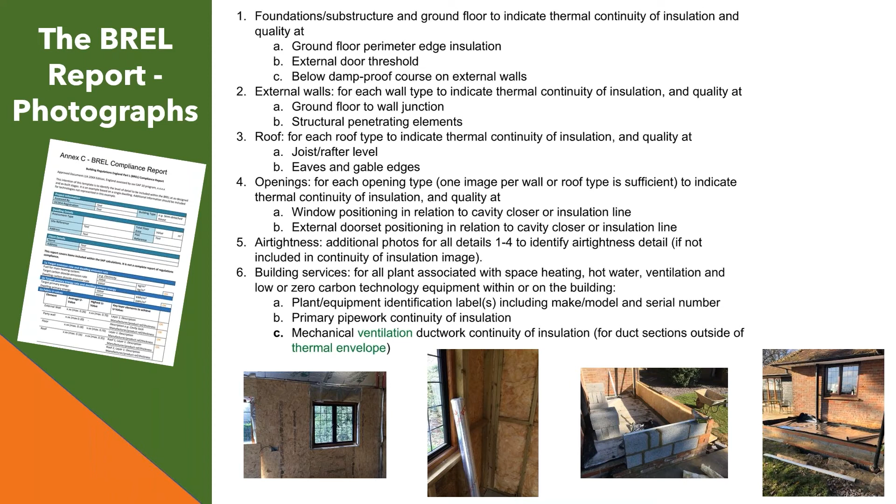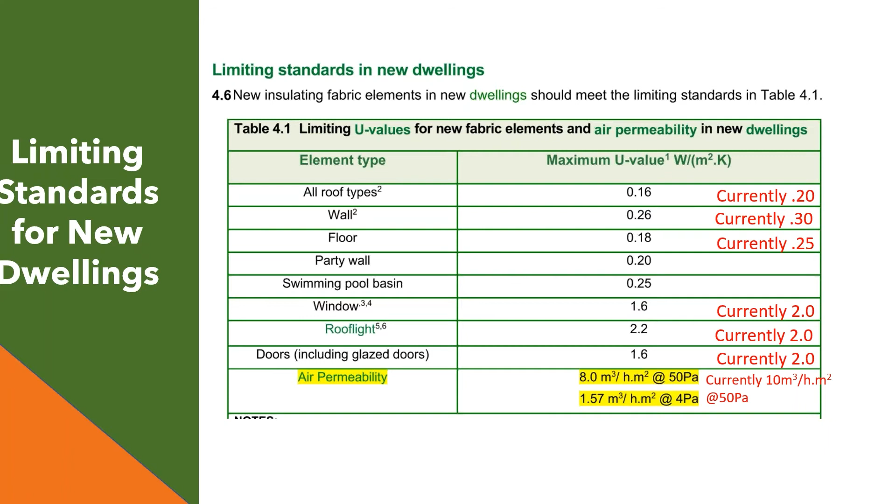And the definition of primary energy is energy from renewable and non-renewable sources which has not undergone any conversion or transformation process. So, for example, you've got chemical energy contained in fossil fuels like coal. Coal is a source of primary energy. However, a unit of electricity generated by burning that fossil fuel would not be considered primary energy because it has gone through a conversion process.

Similarly, with natural gas, it has to be got out of the earth, it has to be refined and transported, and that all uses energy, and same for oil. So the SAP calculation uses primary energy factors and heating plant efficiencies to convert the calculated energy requirements of a dwelling into a primary energy demand figure.

So the primary energy factor, for example, for mains gas is 1.13. In other words, we will need to have 1.13 kilowatts of energy to extract 1 kilowatt of gas from the earth, which includes refining it and pumping it through the UK's pipe network to reach the dwelling. Electricity, surprisingly, is a little bit higher. That's currently 1.5, but of course, these will all change in time as technology improves.

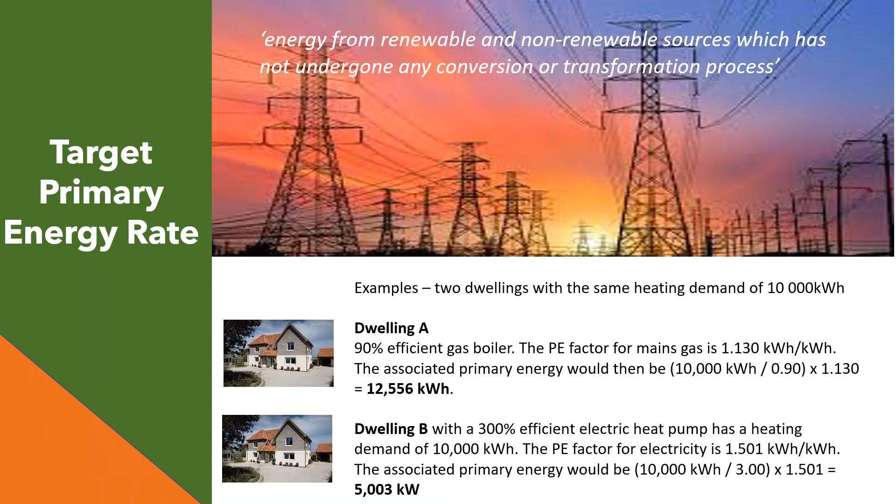So, as I say, the target for primary energy use will take account of both the property's heating system efficiency and the energy use that's needed to produce the fuel and deliver it to the property. So hopefully I got through that, and it's reasonably clear in your minds what that's about.

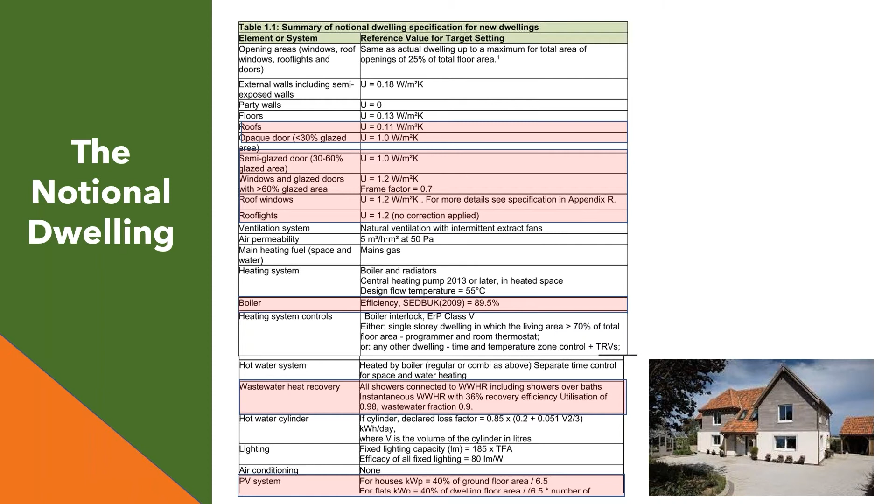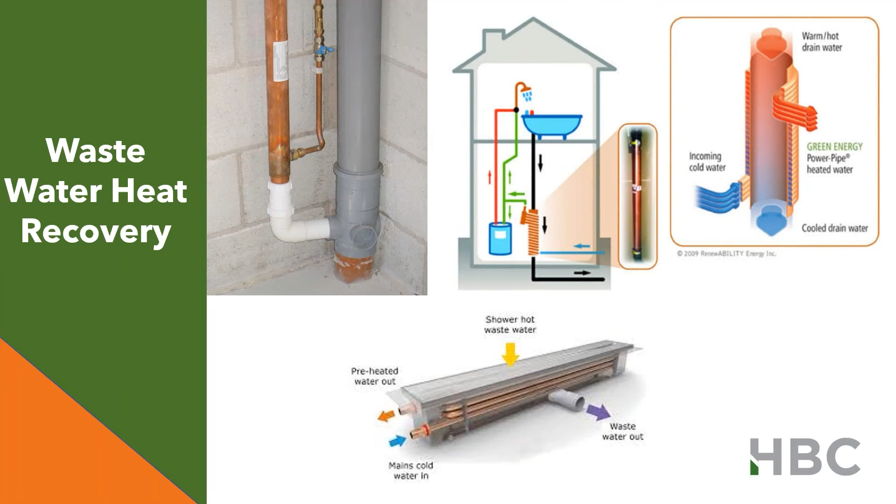So it's partially heating the water and saving energy used by the boiler or the other water heating device, energy that would have literally washed down the drain. So yeah, there's this expectation to put those in. If you don't, then there will have to be other compensatory measures to be able to hit the targets in the SAP. It would be interesting to see how plumbers get their heads around those. I should imagine there'll be a few expletives cast around site until they get used to it.

So that was all about new dwellings. There may be a few of you out there who are involved in extensions and alterations to dwellings. What's happening with those? Well, what's currently tables 1 and 2 in the approved document will become this new table 4.2 in the draft approved document.

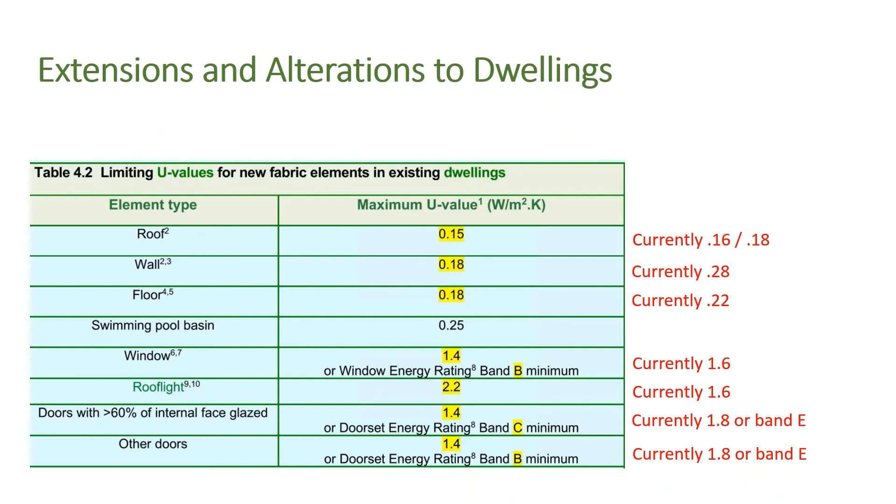So I've shown there again in red what the current standards are, just so you can see how they're being tweaked slightly. The big one there is a bit more than a tweak: walls from 0.28 to 0.18. So yeah, we'll be interested to see how designers and industry hit that standard with your traditional cavity walls, brick and block. We're going to be seeing some big cavities. We're going to be seeing more use of high efficiency insulation, because that's going to be a huge cavity if you're going to be using mineral fiber or fiberglass bats to achieve that mark. But yeah, that's what's happening with extensions.

We're seeing a new phrase in the regulations of self-regulating device coming up quite a lot, i.e. a device that automatically monitors the output of heating or cooling. And there's an emphasis on those being provided individually to control temperature in each room, or if it's an open plan in each zone, and that's sort of a mandatory thing now. It might be as simple as a TRV on a radiator, which people are putting in anyway, obviously. But obviously, underfloor heating, usually that also is controlled for rooms, so it's not going to have too much effect there.

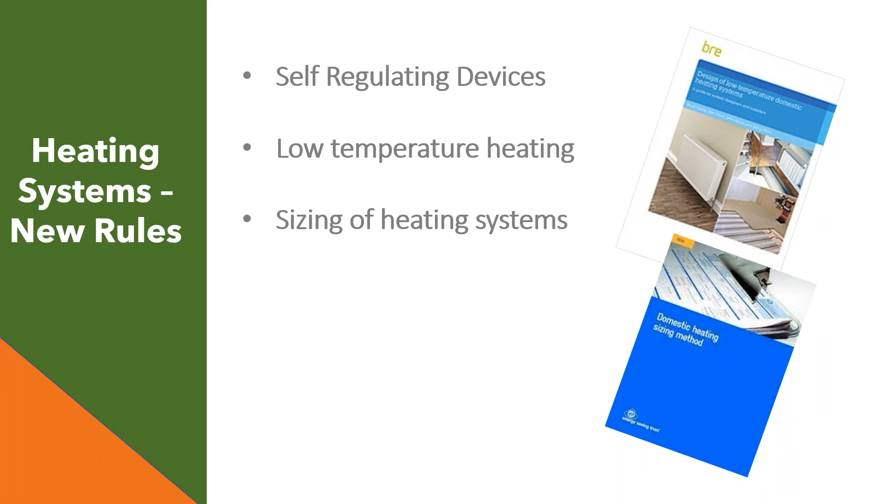Got to be careful. Regulations are saying that you must not oversize systems. They must not be more than 120% of the design heating load. And there's various publications to give you guidance on that, including that Energy Saving Trust document there, CE 54. So a few more new rules. We've got heat pumps. Heat pumps must be designed and installed in accordance with the Microgeneration Certification Scheme standard. That's MIS 3005, shown at the top there. Cooling systems have to have an energy efficiency ratio of at least 4. And again, there is that sizing requirement not to exceed 120% of design cooling load, because that's just wasted energy that doesn't need to be used.

For mechanical ventilation, we now have new targets for fan power efficiency. For a typical domestic intermittent extract system that we're seeing in most properties, that's 0.5 watts per litre per second of extraction rate. So that's what we're looking for there on fittings. And if you're going to install a supply and extract package system, it must include heat recovery with at least 73% efficiency.

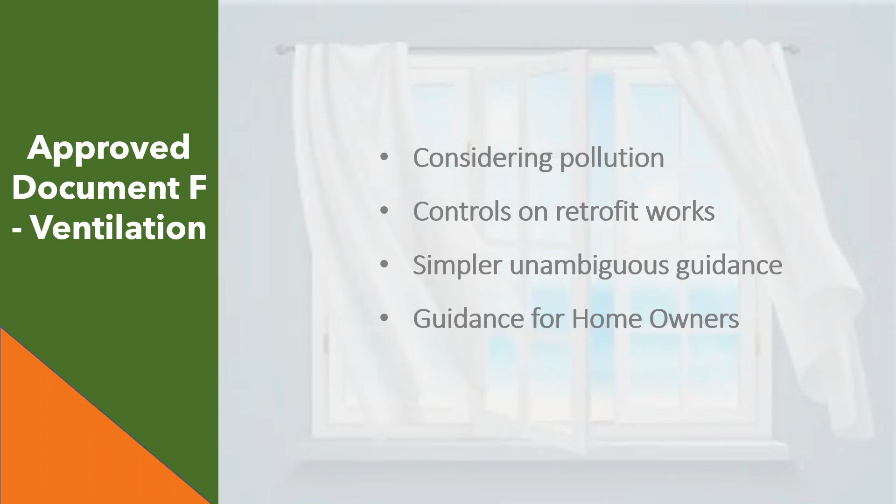Well, you don't see stale air, you don't know the carbon dioxide levels you're breathing in and other pollutants, all the VOCs, and there's no warning in a property, no environmental monitor that's going to tell you that. So call me a cynic, but I don't think this is going to do it. I think we do need smarter systems, and time will tell. And we're on the run in now, as mentioned earlier.

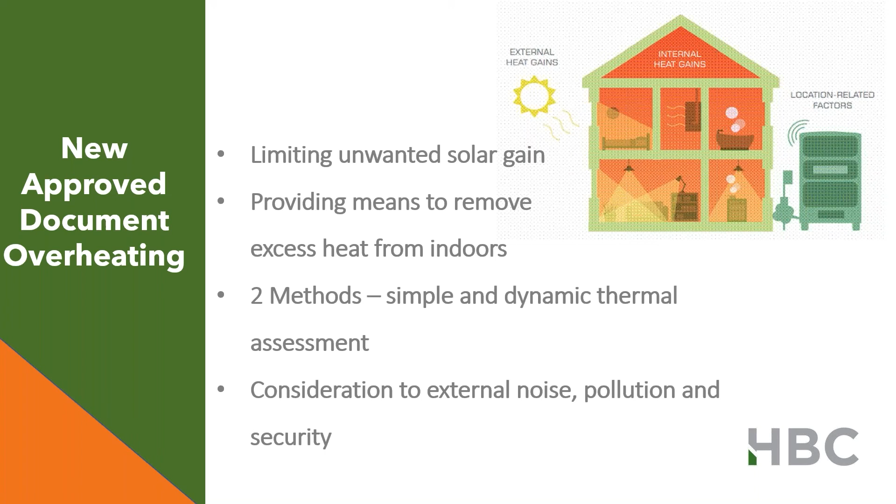Heat pumps are already a predominant technology in some other countries and have high levels of customer satisfaction. However, work needs to be done to build UK supply chains and drive down costs. Meanwhile, we will continue to invest in hydrogen heating through the neighbourhood and village trials, and this will allow us to take strategic decisions on the role of hydrogen in heating by 2026.

So it looks there that hydrogen is still very much on the table. I thought the big push was all towards heat pumps, but no, there may yet be a use for our network of pipework that's currently supplying natural gas, and the technology is being trialled and developed as we speak, and the results of that obviously will influence to what extent we see it as a viable fuel for the future, and also what the primary energy factor will be for that fuel.